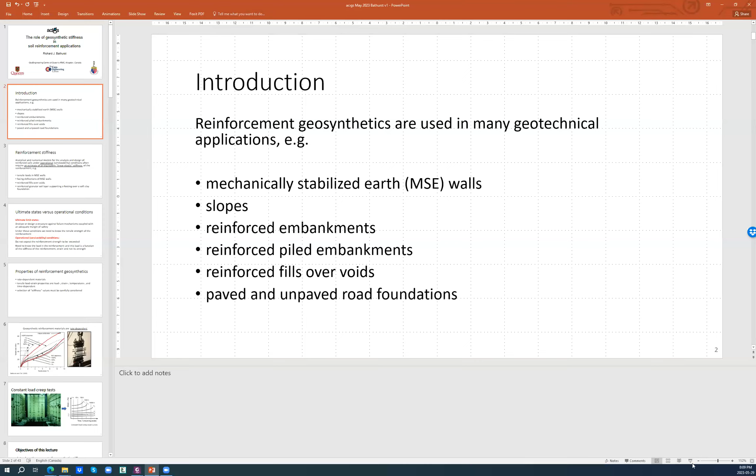So this was my title slide, the role of geosynthetic stiffness in soil reinforcement applications. And like I mentioned, this is a topic of great interest to me, and I'm happy to have the opportunity to share my thoughts on this topic with my friends in Australia.

By way of introduction, I'm not sure that I have to say much to this group, but reinforcement geosynthetics are used in many geotechnical applications. These include mechanically stabilized earth walls, MSE walls, slopes, reinforced embankments, reinforced piled embankments, reinforced fills over voids, and paved and unpaved road foundations.

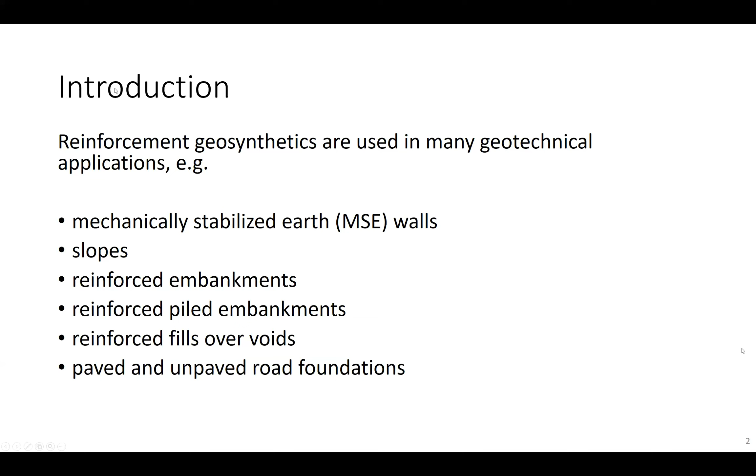Reinforcement stiffness. Analytical and numerical models for the analysis and design of reinforced soils under operational conditions, that is serviceability conditions, often require an estimate of the equivalent linear elastic stiffness of the reinforcement.

Examples of this are computing the tensile loads in MSE walls under operational conditions, predicting or estimating the facing deflections of MSE walls, the loads and strains in the reinforcement for reinforced fills over voids, and the problem of a reinforced granular layer over a very soft foundation.

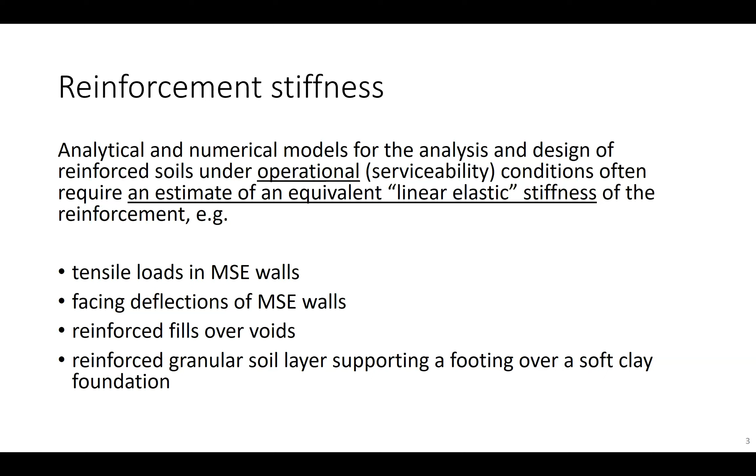Now, it's important to make a distinction between serviceability conditions, operational conditions, and ultimate limit states. When we speak about ultimate limit states, then we're analyzing or designing a structure against failure mechanisms, which are coupled with estimates of adequate margins of safety. And under these conditions, we need to know the tensile strength of the reinforcement.

Under operational serviceability conditions, we are not expecting the reinforcement strength to be exceeded, i.e. the reinforcement to rupture or yield. But we do need to know what the load in the reinforcement is. And this load is a function of the stiffness of the reinforcement, the strain in the reinforcement, and not its strength.

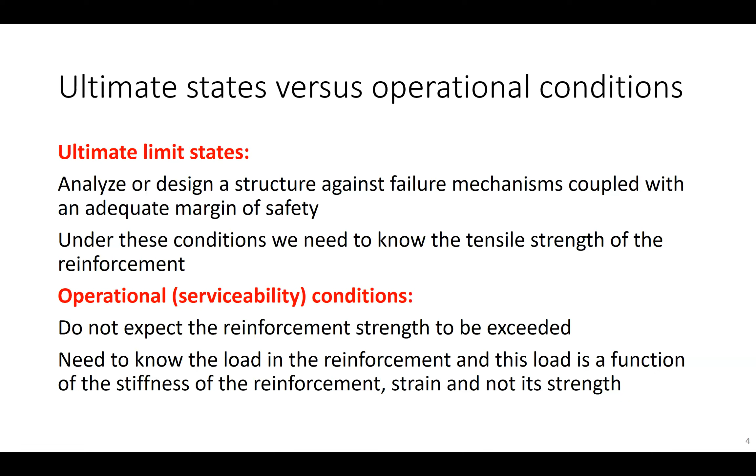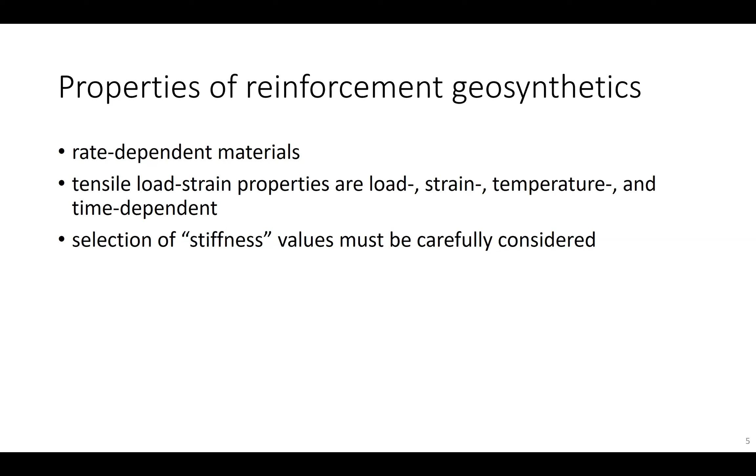The challenge is that reinforcement geosynthetics are rate-dependent materials. This means that their load strain properties are load, strain, temperature, and time dependent. And this makes the selection of stiffness values to be a challenge and to be carefully considered.

And I can demonstrate this by looking at the results from some constant in-air tensile tests. What you see in the photograph on the right-hand side is a conventional in-air tensile test apparatus, and it's showing a uniaxial HDPE geogrid.

In North America, the standard test is carried out at 10% strain per minute. And if we look at the top red trace in the plot on the left-hand side, that shows the load strain response of this particular material at 10% strain per minute.

If we speed up the test, then we can see these other curves, and you can see that the material is exhibiting a stiffer response.

If we perform the same series of tests on a polyester material, the rate effect is less for these materials. They also have a different shape, typically a sigmoidal or S shape. But over the low strain levels and low load levels that we assume are of interest under operational conditions, you can see that these curves are showing a similar strain hardening type of shape.

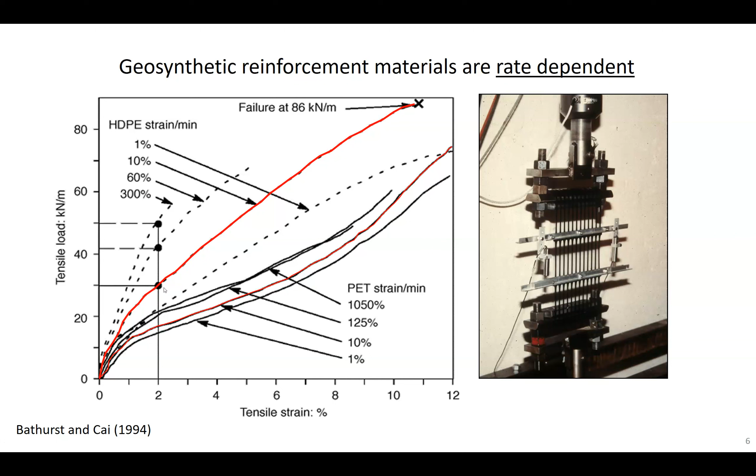The most common approach to quantify rate-dependent properties of these materials is to carry out constant load creep tests, as illustrated in the photograph on the left-hand side. Although today stepped isothermal methods are also common, but let's stick to these simple constant load tests for simplicity.

These specimens are subjected to constant load, and the strain under constant load is recorded against time on a log scale. What we expect is that as a sample is subjected to a higher load, then these strain-log-time curves shift upward, as you can see through this set of curves on the right-hand side. And these specimens will go through primary, secondary, and tertiary creep to rupture if the load is great enough and the load is left in place long enough.

Under operational conditions, again, we're interested in strain levels and load levels that are at the low end, and the material remains in a primary strain mode where we wouldn't expect the material to strain to rupture.

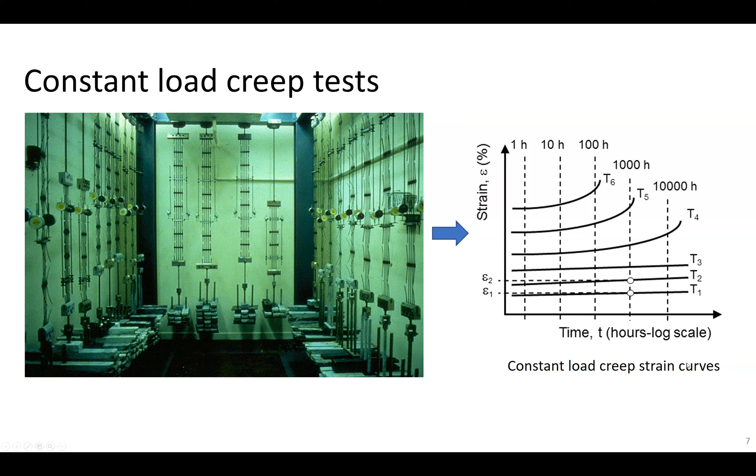The notion of isochronous load strain curves is not new. In fact, we can trace their use back to the 1980s with the work of Alan McGown at the University of Strathclyde.

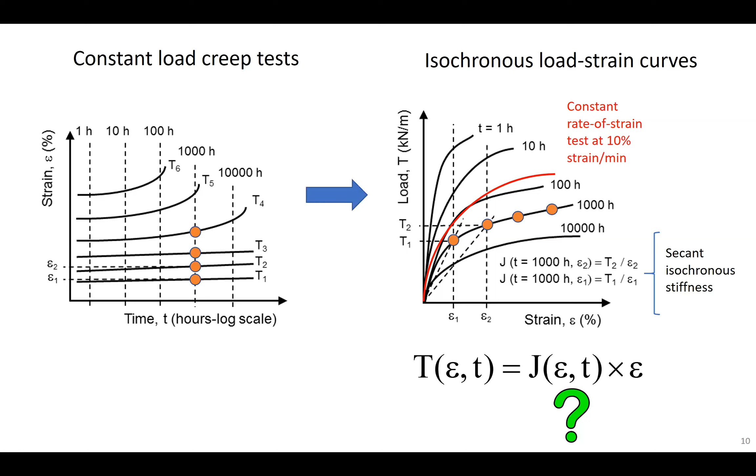This leads to the development of a simple two-component isochronous stiffness model to reproduce rate-dependent behavior.

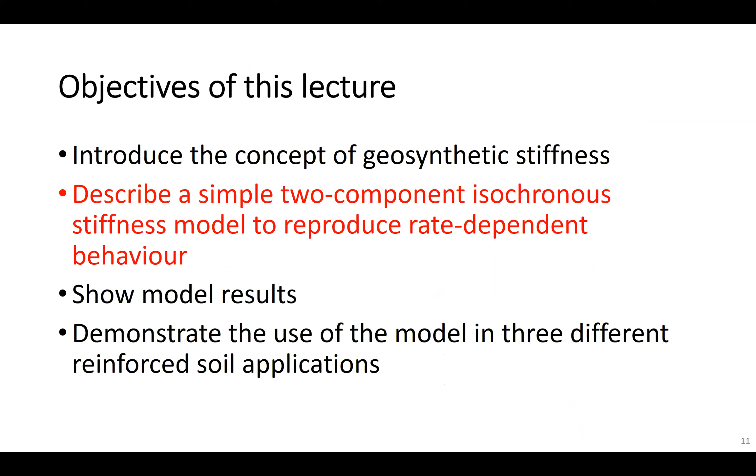After connecting these points on an isochronous curve, we can then construct a secant isochronous stiffness curve as shown on the right-hand side. Each one of these points has a slope, and at the same strain, I can plot that slope on that particular isochronous curve, giving me an isochronous stiffness curve. A two-component model of hyperbolic form can be used to capture that trend quite nicely.

This formula has two components. One is J naught, which is the intercept of these curves with the vertical axis. The chi term that you see here is a quantitative measure of the magnitude of the curvature.

Once we have this equation for each of these isochronous stiffness curves, we can then put it into an equation where the secant stiffness times the strain will give us the load that is predicted at that strain and that time.

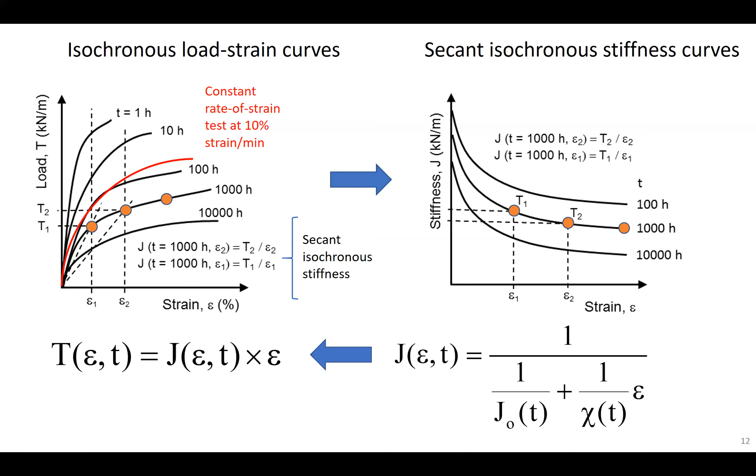Now, to find these parameters, my PhD student, Fahimi Naftchali, collected more than 600 constant load tests. These are high quality tests, a lot of them from the AASHTO NTPEP program in the United States. All of these tests were carried out in conformity with appropriate ASTM standards.

There were 89 different products and 7 product classification types. So these data fell into different categories, including high density HDPE geogrids, polyester PET, woven and knitted geogrids, polypropylene punched and drawn geogrids, and et cetera, including even PET strap reinforcement products.

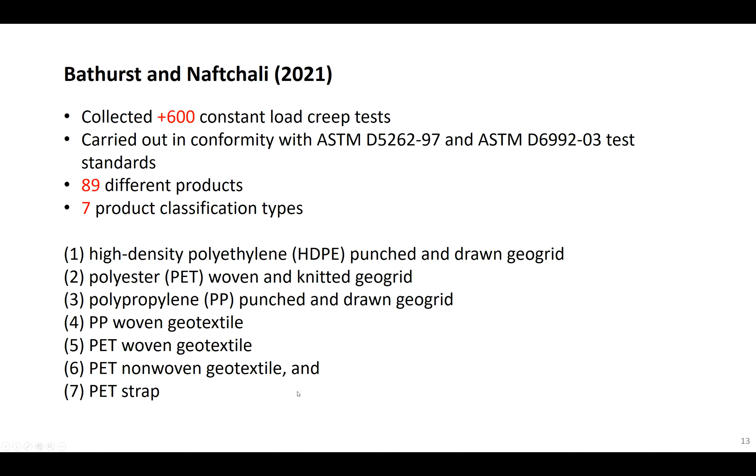What you see on the left-hand side are a series of load strain curves for a polypropylene geogrid. Using the procedure that I mentioned before, we constructed the secant isochronous stiffness curves for this data. You can see that for each isochronous curve, there's an intercept, which is the J naught term, and the chi term is a measure of the curvature of these stiffness curves. In the shaded box, you can see the numerical values for those two parameters.

It's interesting that as the strain in these curves increases, and time increases, these isochronous stiffness curves tend to converge as well. But when you're operating at very low strain levels and short times, you can see there's quite a big range of stiffness values that can be computed.

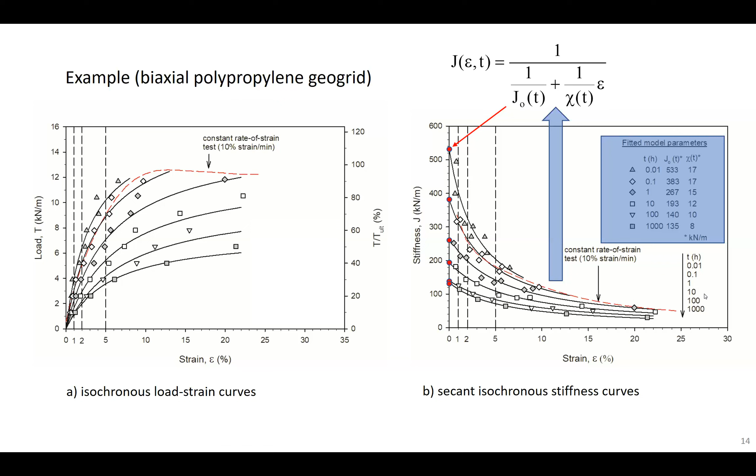This slide shows another material, a PET woven geogrid. Again, you can see on the left-hand side the isochronous load strain curves at different hours, and the constant rate of strain test again falling well above those curves.

From this data, this two-parameter isochronous stiffness equation has been fitted. Intercept points are shown here, and you can see that as time and strain increase, they do tend to flatten out. In this shaded box, those are the extracted J and chi values for this particular product.

And we did this for almost 90 different products. This data has been published in the paper I referred to earlier, in 2021 in Geotextiles and Geomembranes.

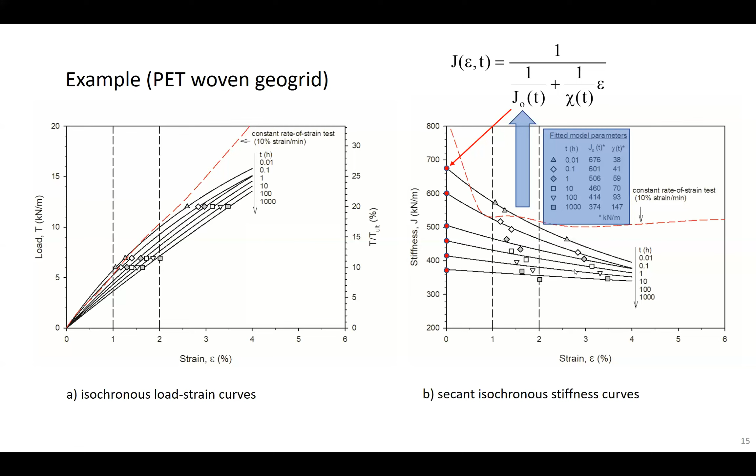This slide shows some trends. Here we have plotted the stiffness curves, and if you focus on the red curves, these are curves that have the same J-naught term value but decreasing values of this chi term, which means they're creepier. As this chi term decreases, you can see how the curve becomes more pronounced, indicating a product which is more creep susceptible.

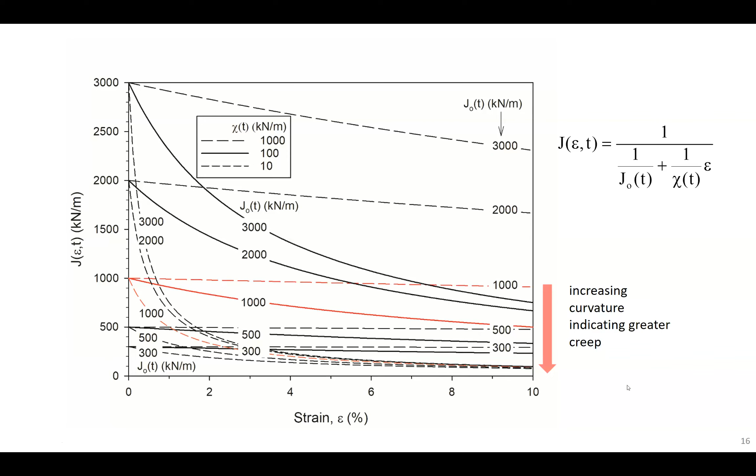The nice thing about this model is that when chi-t is very large, effectively what you're modeling is a linear elastic material. So this model can actually be used for very stiff, inextensible reinforcement - it's not just confined to extensible polymeric materials.

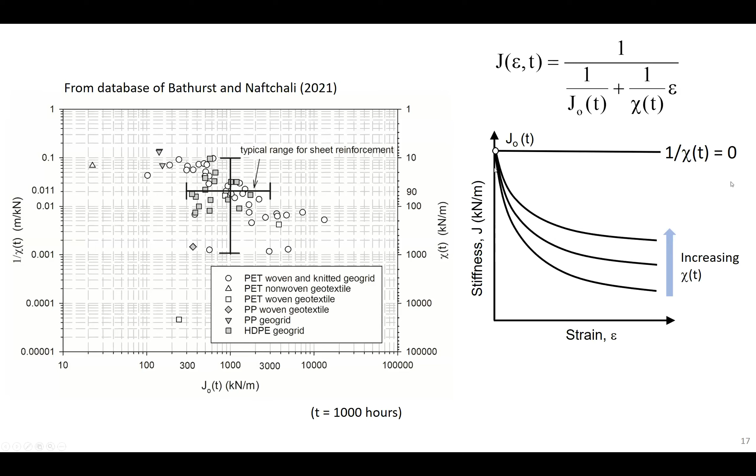When we examined this database, we noticed some trends. What we found, not unexpectedly, was that if you plot the stiffness of a reinforcement - the secant stiffness value - it generally increases with the ultimate strength of the material. I think that is not contradictory to our intuition.

In fact, we found we could come up with linear relationships between the secant stiffness and the ultimate strength for products. In some cases, a better fit was between the stiffness value and a power function of this form, depending on the material.

For a particular class of material, for example HDPE geogrid, when we take all of our data for that material together, a useful approximation is that the stiffness of this material is about 6 times the ultimate strength of this material. Similar coefficients of proportionality are available for other classes of material.

If you take all the data together - we can call this pooled data - then there's a linear relationship again, and that coefficient of proportionality is about 5. So you ask yourself, so what?

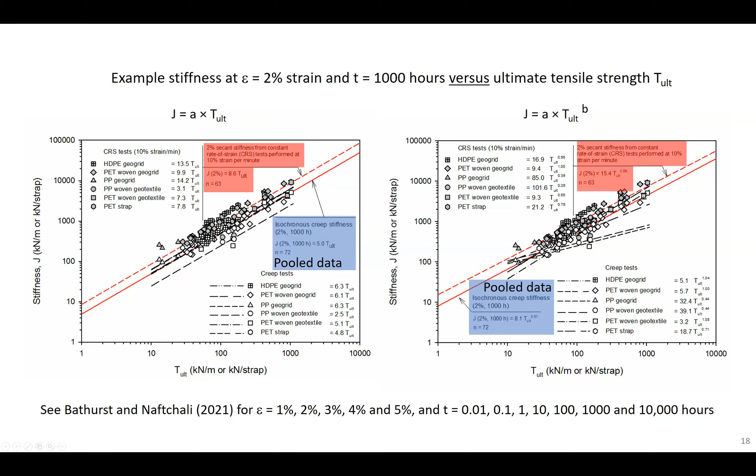So getting back to that point, if one wants to think about the estimate of the reinforcement stiffness from an uncertainty point of view, if you have product specific data—in other words, you've gone to the time and expense to carry out constant load creep tests or other forms of creep testing—the variation in your estimate of the stiffness of that material might be about 6%.

If you know that your material is part of a class of materials, then when you use the linear approximation I showed you before, your estimate of the stiffness will have a COV of say 20%. And if you just lump your product in with all the other data that we've got, then the uncertainty is about 27%. This demonstrates that there is a practical benefit to carrying out product-specific creep testing, because you are rewarded with a better estimate of what that stiffness is.

And nowadays we are moving towards probabilistic or reliability-based design methods, and these types of estimates of uncertainty in input parameters become very important. So this type of data is progressively being used in reliability-based design. And if you do reliability-based design and you have your actual product-specific data testing at hand, you are going to be rewarded with a more accurate estimate of the stiffness of the material, and it actually turns out you'll end up with a more cost-effective solution. But probabilistic design is beyond the scope of this particular lecture.

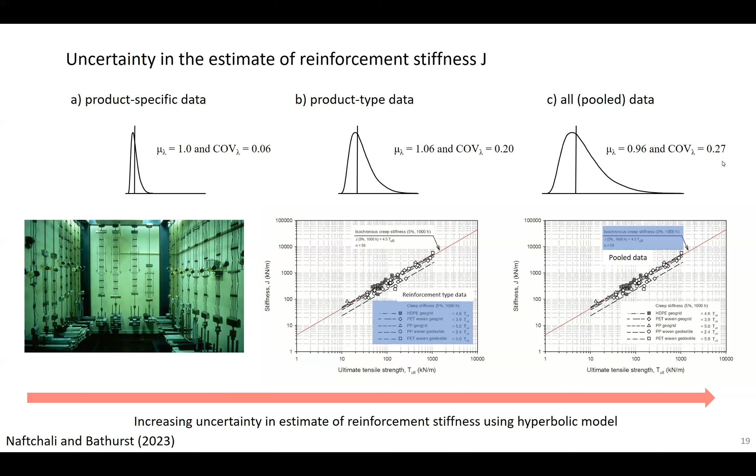So let's look at some example applications where stiffness matters. The first example I'm going to show is one in which we want to estimate what are the out-of-alignment wall profiles for a wrapped face MSE wall. So you see on the right hand side this idealized schematic of a wrap face wall.

And there are some solutions in the literature, including one by Jewell and Milligan, where you can calculate for each soil layer with a reinforcement layer in the middle of it what its displacement will be after it has been put in place. So this delta H is just the incremental displacement of that soil layer, and it's computed using this equation that you see here. What you see is that this parameter J, which is the secant stiffness of the reinforcement, will obviously play an important role in this calculation.

The rest of the terms are largely familiar: there's an active earth pressure coefficient, soil unit weight, coverage ratio—whether you've got 100% coverage of the soil layer going into the slide—soil dilation angle, and soil peak friction angle.

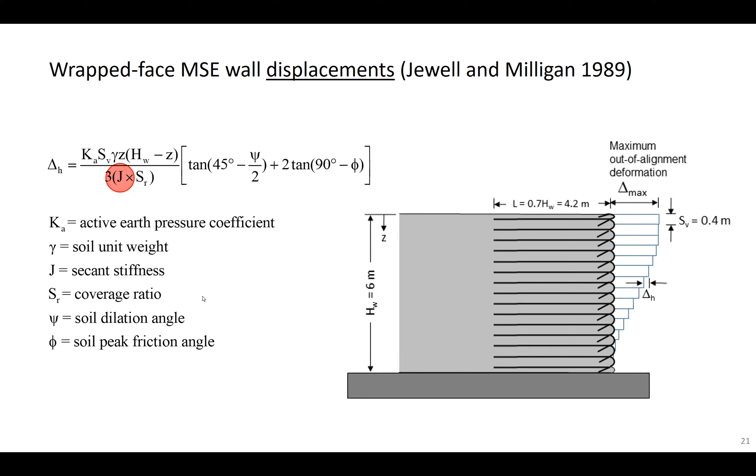So if I have those parameters and use this equation, then I can generate plots on a project-specific basis, as you see here. What you're seeing on the horizontal axis is the horizontal displacement of the wall at the end of construction, and the vertical axis is just the height above the toe. These plots all have a similar shape, but you can see that as the reinforcement becomes stiffer, the deformations at each elevation are less. I think this fits our intuition.

I have also plotted in this figure, in the gray zone, the range of values of displacement that have been specified or expressed as expected values in various research papers and in codes and guidance manuals. So you can see there's a large range of displacements that we might expect for a wall of this height, and whether we're in or out of that band will depend very, very much on how stiff the reinforcement is.

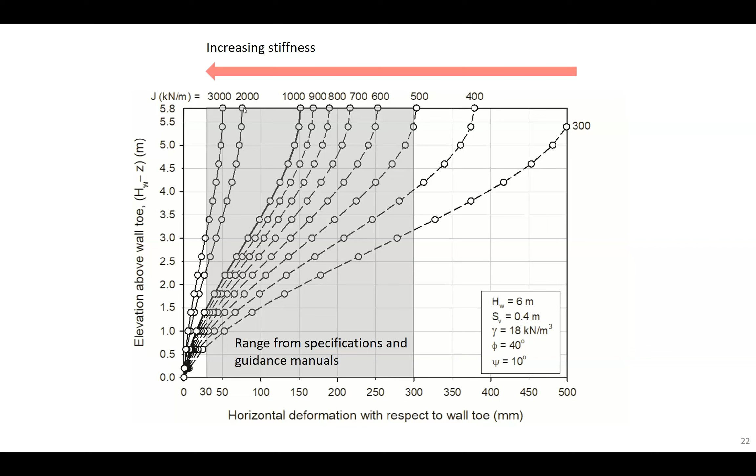Now, you saw in the previous slide that there are other parameters involved in this calculation, including the friction angle of the soil. So one can carry out a parametric analysis and come up with design charts such as the one you see here. The vertical axis on this figure is the normalized maximum out-of-alignment of the wall at end of construction, plotted against the creep stiffness of the material and also the friction angle. You can see that both stiffness and friction angle have an effect.

But if you stare at this plot long enough, what you could convince yourself of is that the stiffness is actually much more important than the friction angle.

The other thing you can see on this plot is that the horizontal axis on the top is actually the ultimate strength, because a reasonable relationship between the secant stiffness and the tensile strength is a factor of 5. This increases the utility of this chart. In case you don't have the creep stiffness value, you can estimate it using pooled data, where the stiffness is about 5 times the ultimate strength.

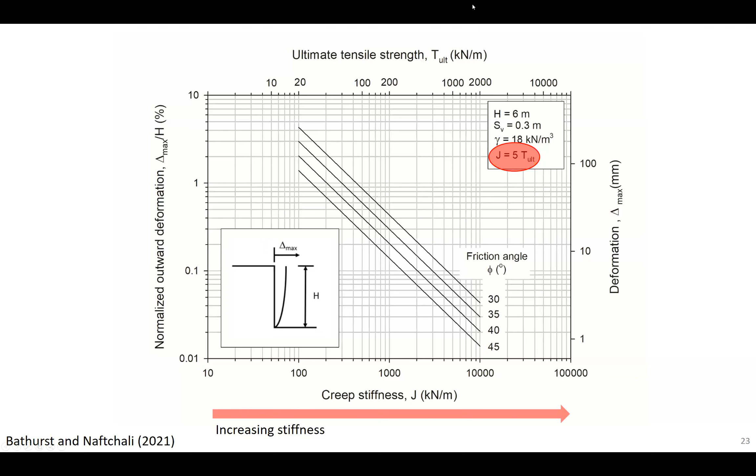Now we can also extend this problem to how we estimate the maximum reinforcement loads in these reinforcement layers. To calculate the reinforcement loads, I can use the stiffness method, which appears in the AASHTO code in the United States. When you unwrap the equation for the maximum load in a reinforcement layer using the stiffness method, it looks like the equation you see here. The maximum load in the reinforcement is related to the magnitude of the stiffness of the reinforcement, plus a whole bunch of other things, like the spacing of the reinforcement, SV, the height of the wall, and some other parameters I won't get into in detail.

So from this equation, and knowing what the strain is, which we got from the last chart, we can calculate it. We could also calculate the strain, as shown before, knowing the load in the reinforcement, the stiffness, and the coverage ratio.

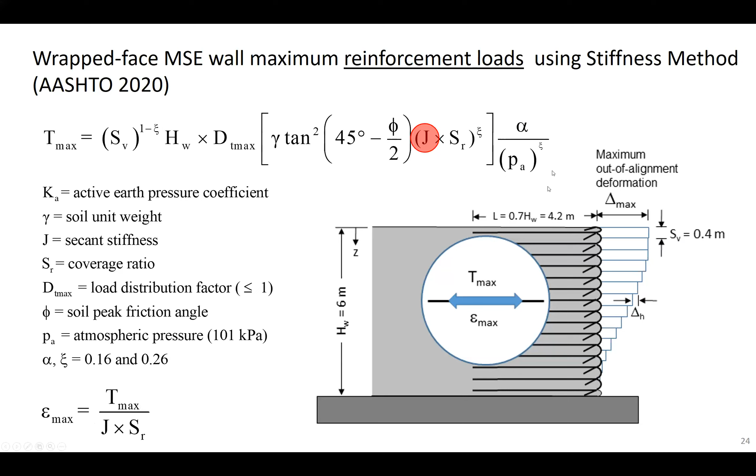So this is for a wrap-faced wall, and we can take this data and make some more plots, as you see here. The horizontal axis is the maximum load in each reinforcement layer, and the vertical axis is the height of our calculated point above the toe. As the stiffness of the material increases, the loads increase, and as the stiffness increases, the strains decrease.

I don't think this is unexpected conceptually. But what is very interesting from these plots, and is a signature feature of the stiffness method, is that the distribution is bilinear. The loads in the reinforcement tend to increase linearly with depth up to a point, and then become more or less constant. This bilinear trend is actually consistent with what's been observed in instrumented full-scale geosynthetic reinforced walls in the field.

The nice thing about this plot is it allows you to examine the maximum strain, because you don't want the strain in the reinforcement to become excessive. In the stiffness method, if the strain in the reinforcement is greater than 3%, that means your soil has actually failed. If you want to keep the structure at working stress or serviceability conditions, you need to keep the soil strains down, which means keeping the tensile strains in the reinforcement below a critical value, for example 3% strain.

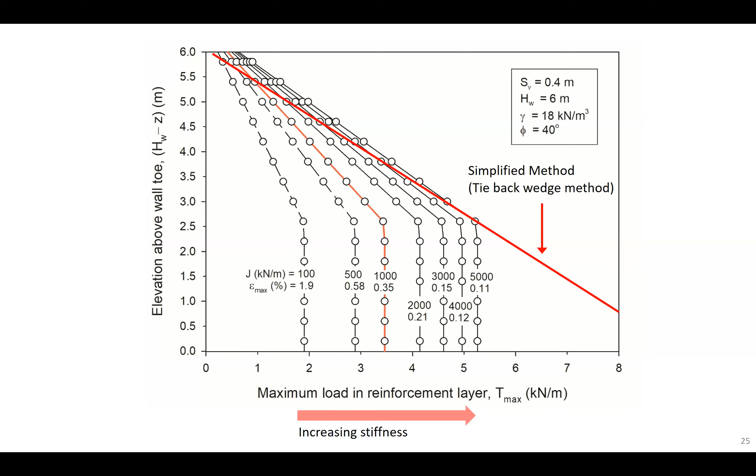Another example where stiffness plays a role is the problem of a reinforced granular fill over a void. The scenario is that in an area where you might anticipate some karstic topography, a void might form after, say, a road embankment has been placed, or maybe you're in a northern area with permafrost melting, or a void forms due to soil washout from a pipe failure or collapse of a mine working, whatever. There are lots of scenarios where a void could happen, and the problem is that this could cause the embankment to locally collapse. So a strategy in these types of terrains is to place a reinforcement layer near the bottom of the fill in order to mitigate against foundation collapse.

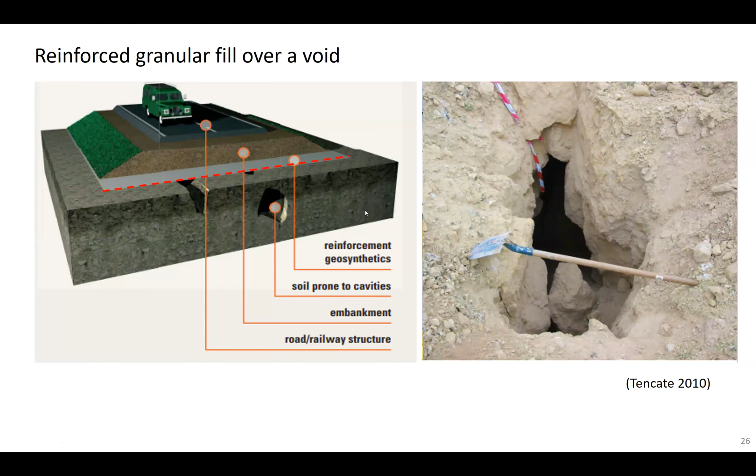For example, let's keep things simple and imagine we have a long void, a trench-like void extending into the slide, with a width of B. There are solutions available in the literature to calculate what the maximum load and strain will be in that reinforcement layer for a particular scenario.

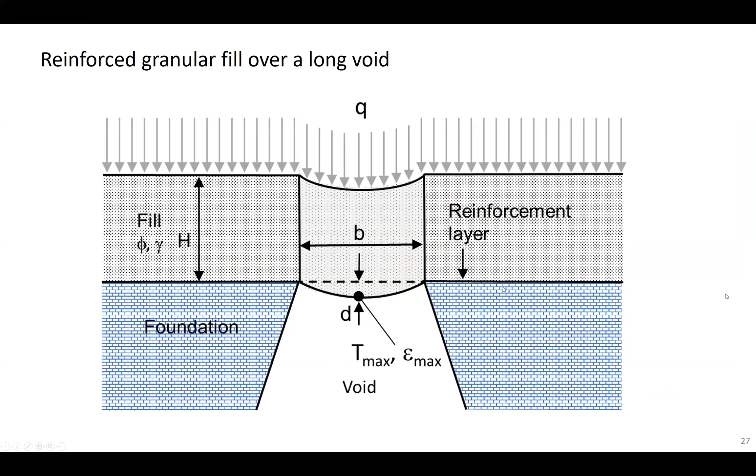This limit state would be exceeded if the maximum load exceeds an allowable load, whatever you decide that should be, it might be one-third of the ultimate strength. If you don't satisfy that relationship, then you have a strength limit state failure.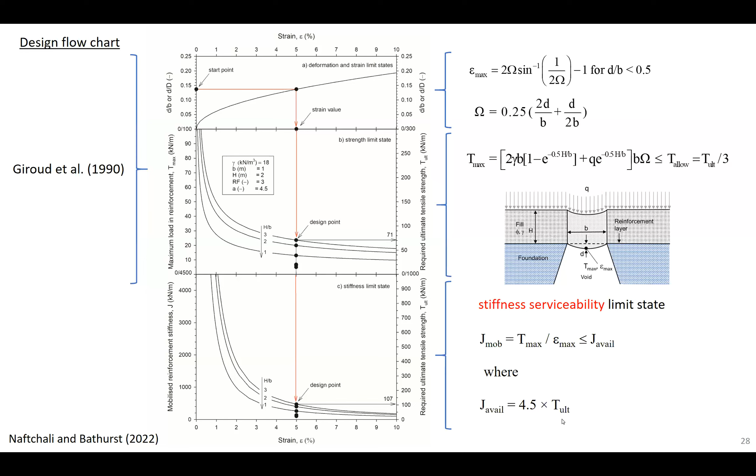Here is a chart that summarizes some of the points I've just made. When you use this method, you have to assume a ratio of reinforcement deflection at the void, normalized with the void width, and that gives you a strain curve. Knowing this strain curve, you can now find the mobilized stiffness, since you have the strain and the load, and this is the mobilized curve. What you do is make sure that mobilized stiffness doesn't exceed what's available to you.

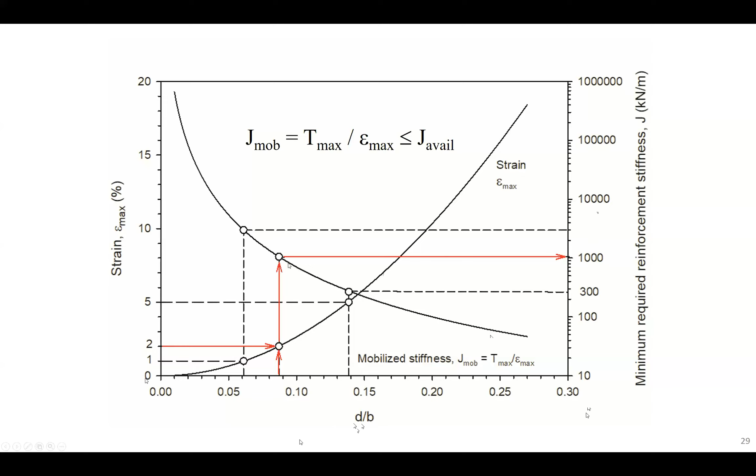Now, those models I've shown you up to this point have been analytical types. But the stiffness is also important if one uses a more sophisticated approach for these complicated soil structure interaction problems, meaning numerical models based on finite elements or finite difference.

In this particular case, we're looking at the problem of a reinforced granular fill over a very soft foundation soil. A granular fill is typically placed over these materials so you can work on the site and place the footing, so that the loads and pressures developed by this footing will be dissipated over a larger area of the soft material. What's of interest is, if we put a geosynthetic reinforcement layer near the bottom of that granular layer, what further improvement in the load displacement response to that footing might we realize, if anything?

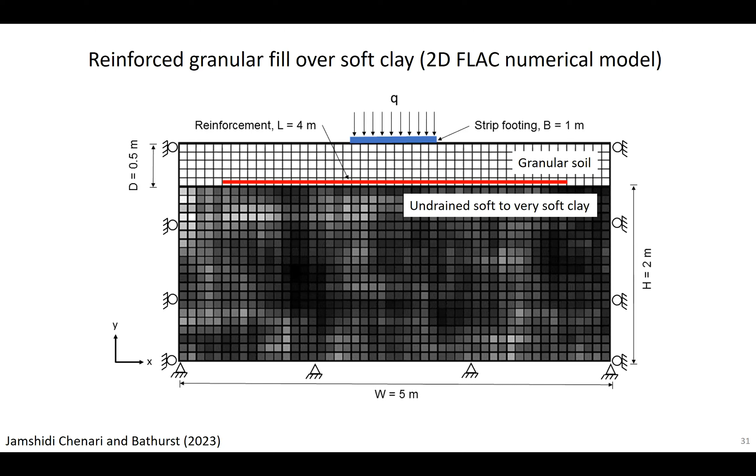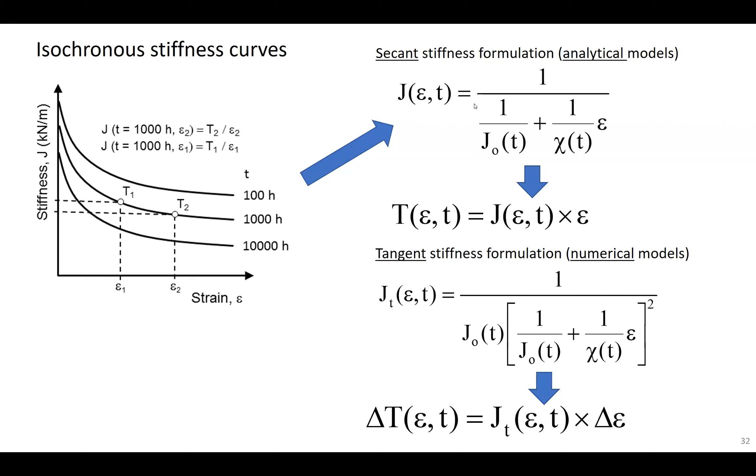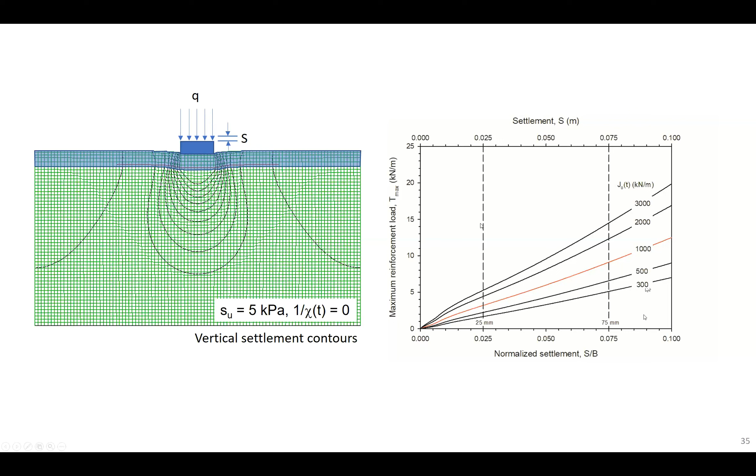The red trace is a typical reinforcement with a J0 value of about 1,000. As the stiffness increases, the load in the reinforcement increases as well. In fact, there's about a threefold increase in the maximum tensile load in the reinforcement as we go through one order of magnitude, from 300 to 3,000 kilonewtons per meter. So the stiffness does play a role in the loads, and obviously the strains that develop in the reinforcement.

Here again we freeze the J0 parameter and just play around with the curvature parameter. What you find is the loads in the reinforcement are less, at every settlement level, for the creepier materials than the less creepy ones. Again, this doesn't surprise us.

From a practical point of view, what you see here—we recognize that J is about 5 times T_ult, and this means we can calculate the mobilized strength in that reinforcement. You can see the maximum mobilized strength is only about 6% of the ultimate strength. So this material, even though it's generating tensile load in the reinforcement, isn't under a load level that would make us worry about whether it may fail in rupture.

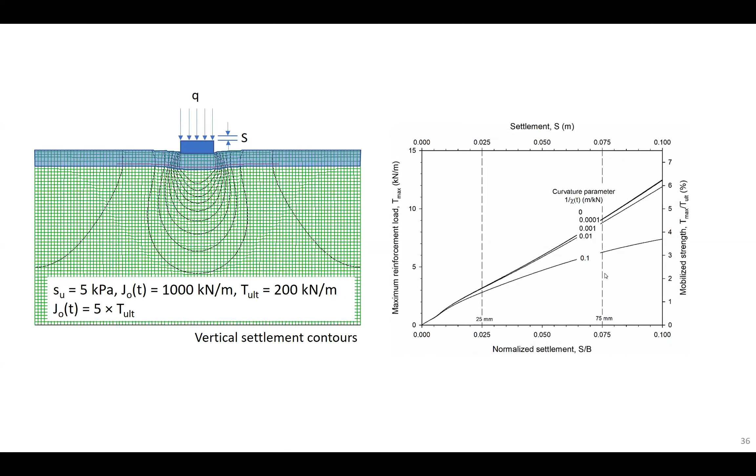Along that theme, we can also look at the distribution of load below the footing. So we have two plots. The one on the left has a chi value of 100 kilonewtons per meter, and the chart on the right has a chi value of 10 kilonewtons per meter.

The first thing you can see is that the maximum loads in the reinforcement layers for the same undrained shear strength are higher for the materials that have a lower curvature parameter. You can see this scale is topping out at 30 kilonewtons per meter, and this one's topping out at 10 kilonewtons per meter. The trends are pretty well the same in both cases.

You can also see that the loads in the reinforcement, regardless of the actual set of stiffness parameters, is actually higher at the edges of the footing than at the middle. And of course, this difference will depend on the width of the footing, and it will also be influenced by the thickness of the granular layer and also by the strength of the clay foundation, obviously.

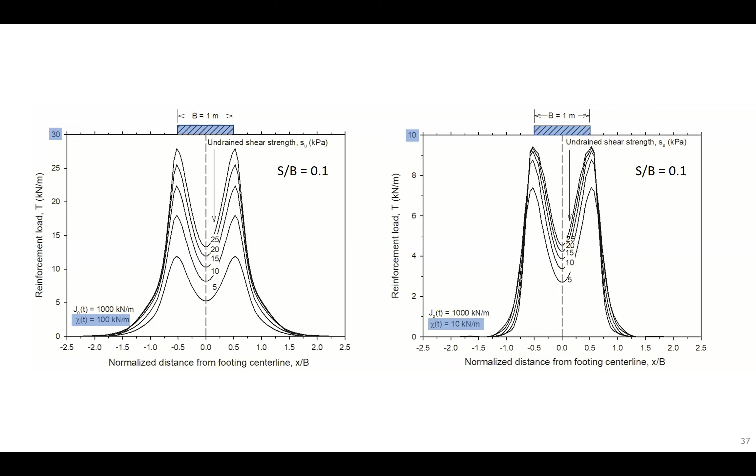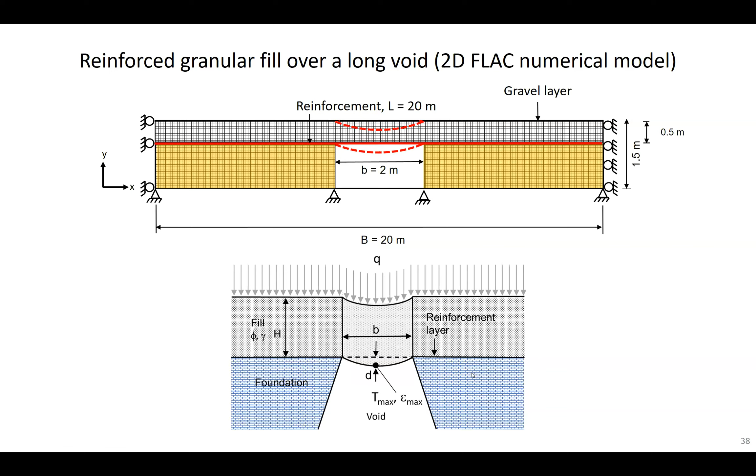What one can do is do all sorts of parametric analysis to see what are the effects of all the input parameters of a problem of this type, the void width, the height of the fill, this type of thing. And this is what my graduate student has been working on recently.

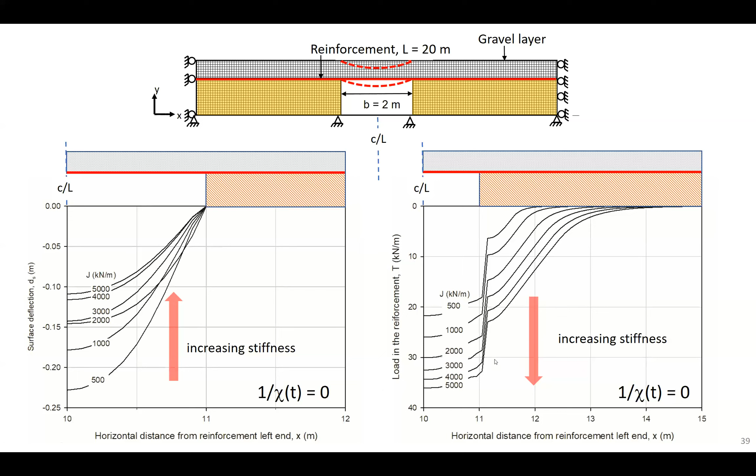So from the collection of slides that I've just shown you and our own work, there's a couple of takeaways from this work and the influence of stiffness. The first one is that under operational conditions, it is the stiffness of the reinforcement that is important, not its strength. And this is a bit of a paradigm shift for us poor geotechnical engineers who were raised on the milk of Rankine and Coulomb.

But under operational conditions, it's not true. Structural engineers understand this, and yet we're a little bit slow in adopting that intuition in our own soil structure interaction problems. If we use rapid in-air tensile tests, we'll overestimate the reinforcement stiffness required in analytical and numerical solutions.

So it will be unsafe for design. On the other hand, when we want to estimate MSE wall deformations, we'll underestimate the deformations, and the tensile loads will be overestimated.

A two-component hyperbolic isochronous load strain model is now available to characterize reinforcement stiffness, and a large database of values is available.

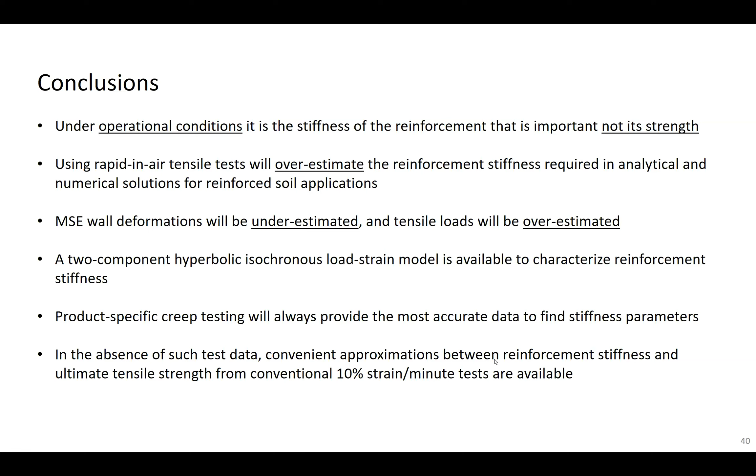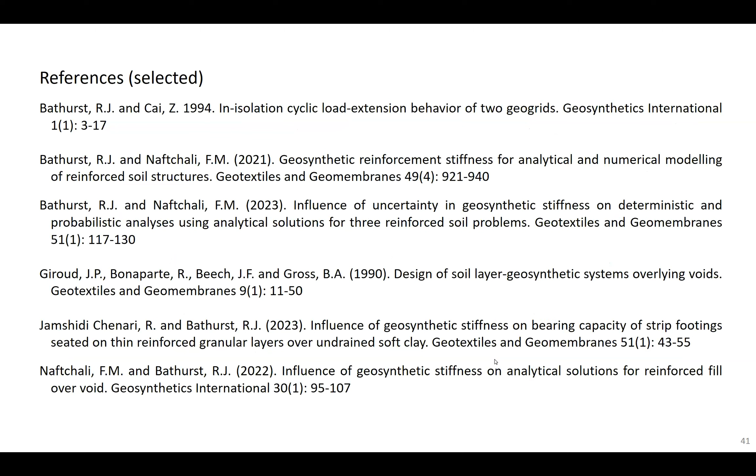So if any or all of these topics are of interest to you, there are some papers that have been published by my group. I'm also citing the paper by J.P. Giroud, which is one of the example design methods for the reinforced fill over void problem that I talked about. These are all online.

Finally, I want to recognize the contributions of my PhD student, Fahima Naftchali, who will probably graduate this summer, much to her relief, and also my friend and current visiting postdoc, Reza Jamshidi Chenari, who has been a great partner in these various projects.